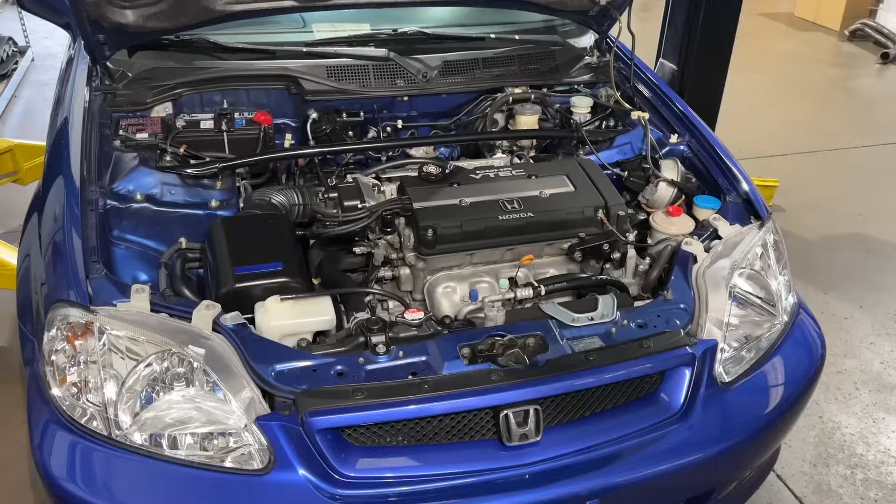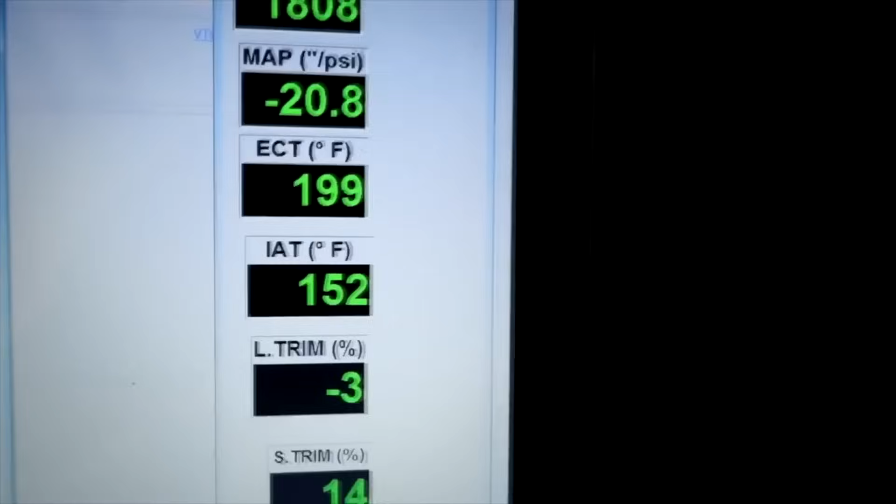So we supercharged this car about 2 years ago. So look how clean this thing is. This is as stock as they come. This is a Jackson Racing supercharger with a 10-pound pulley on it, notorious for having really high intake air temperatures. Watch this number right here.

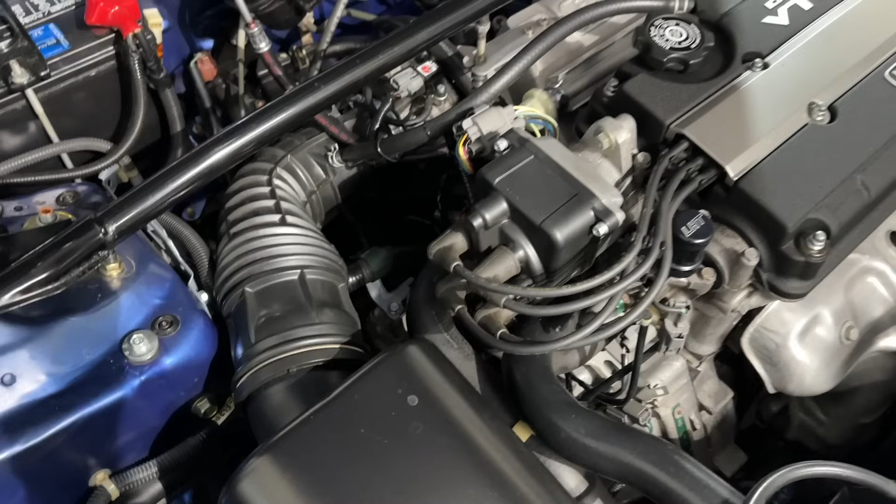He's doing one of our supercharger intercooler packages, as well as the Billet S Tube, the LHT Throttle Body, and the LHT Griptec Pulleys.

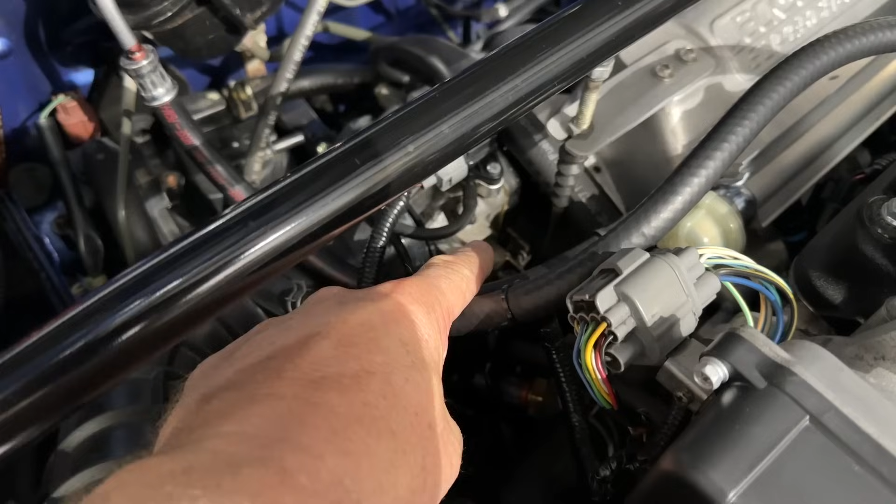One thing to note with our S Tube and Throttle Body, it takes all of that really tight area there and smooths it out. It's going to bring that throttle body out of that hole. It's going to eliminate this bracket right here. The throttle body bracket is all self-contained. It's a smoother transition. Not only does it make power, it just fits much, much nicer.

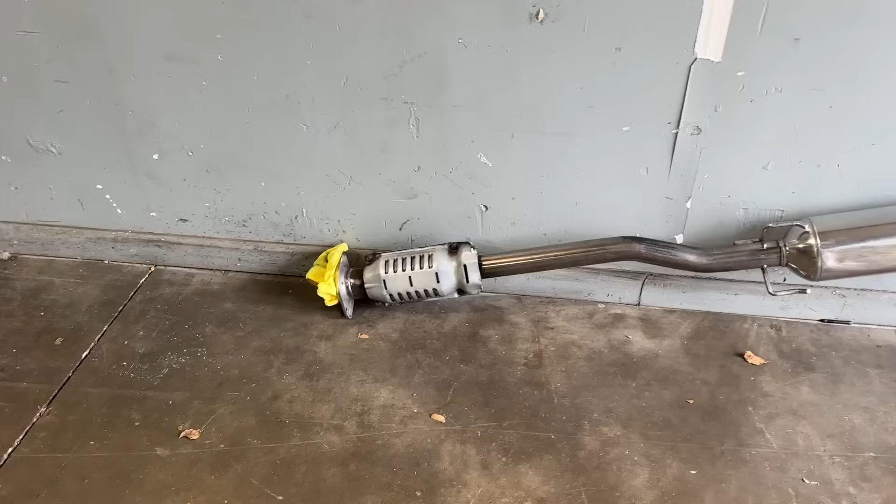There is a list and there are additional parts. So this is a muffler he wants to install and attach to the mid-Mugen exhaust that he has. And then we have some OEM parts right here. The Type R master cylinder right there.

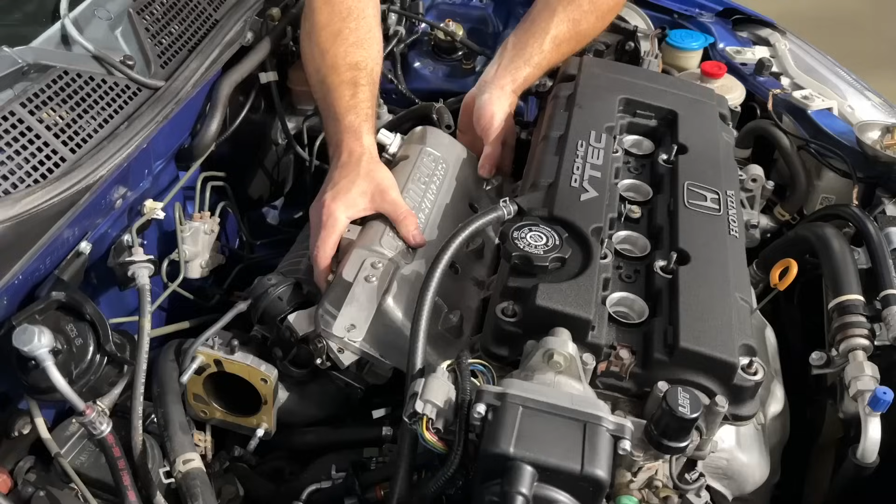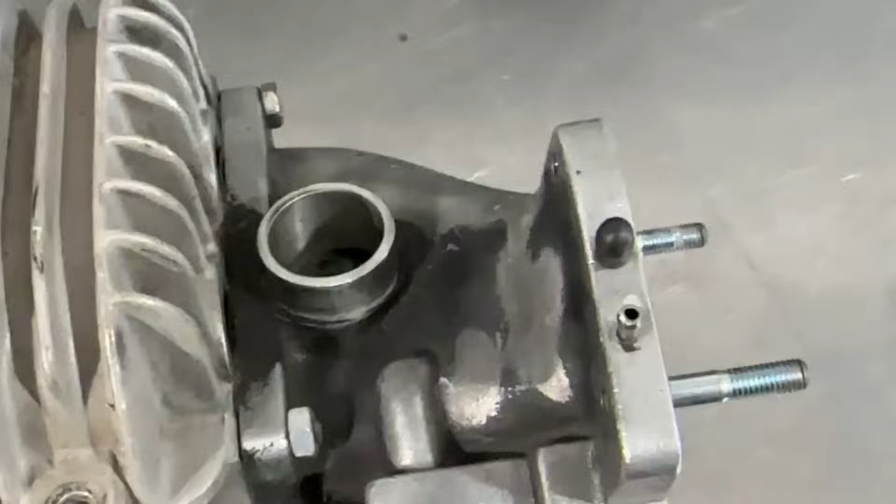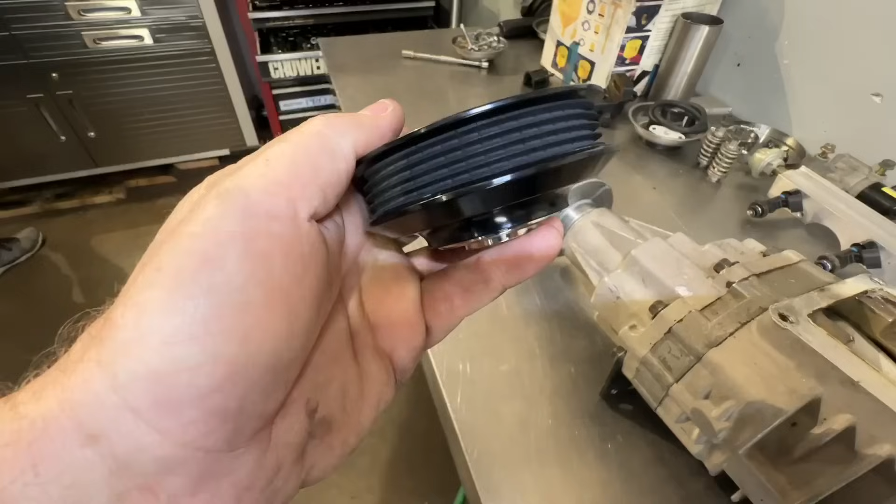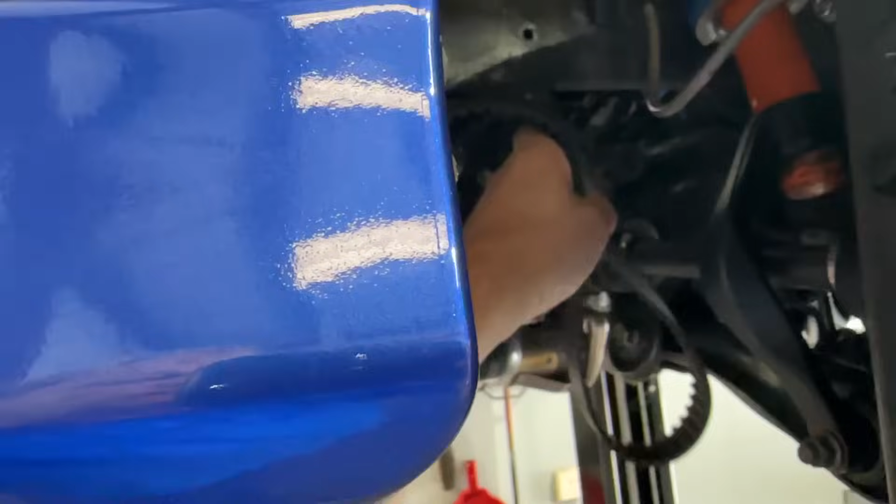Remember, on a supercharged Jackson Racing car, boost is restriction in the intake manifold. The better the engine breathes, the lower the boost. Hence why if you do a better flowing head, cams, header, intake and such, the boost will actually go down, the power will go up. We're also replacing the timing belt, water pump and tensioner at the same time. He's also supplied an ITR master cylinder, which will make the brakes much more powerful and more positive feel.

I do want to say a big thank you for the gift cards, Brian. It truly is appreciated. Thank you so much.

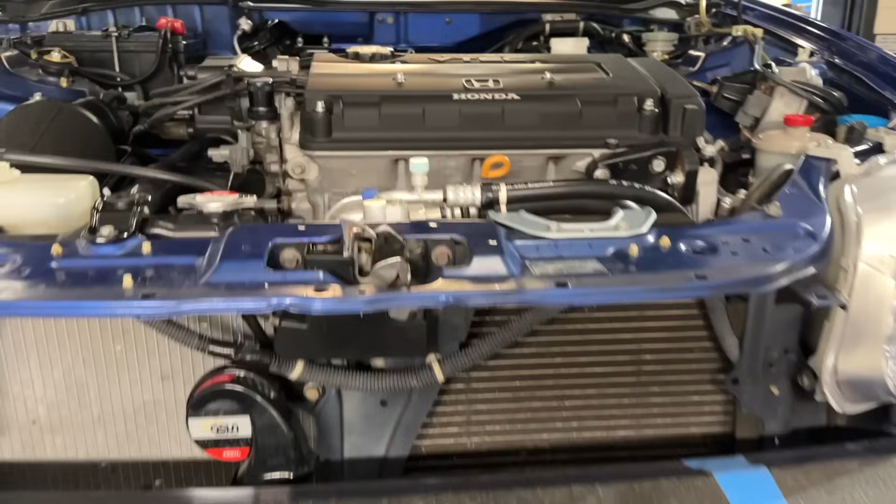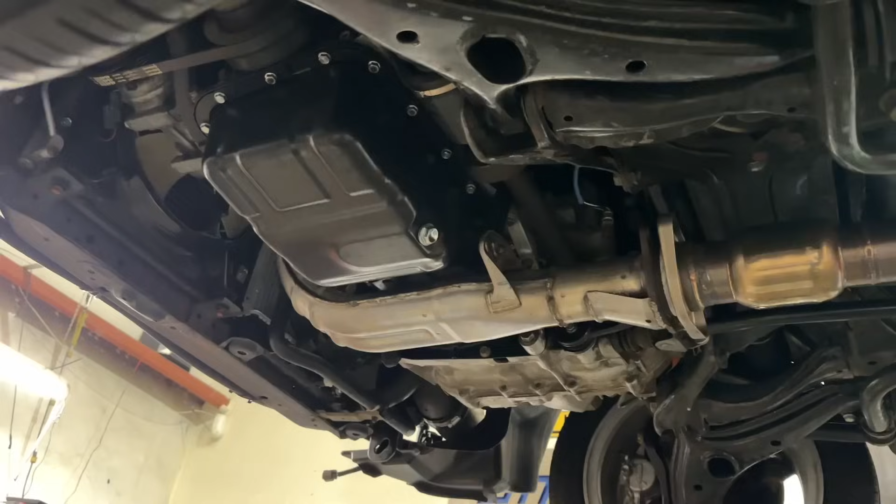For the intercooler, we're using a 50-50 mix of water and coolant. So he supplied us with a JDM header and a factory catalytic converter. So he wants to change that mid-pipe too. He supplied us with a Mugen mid-pipe.

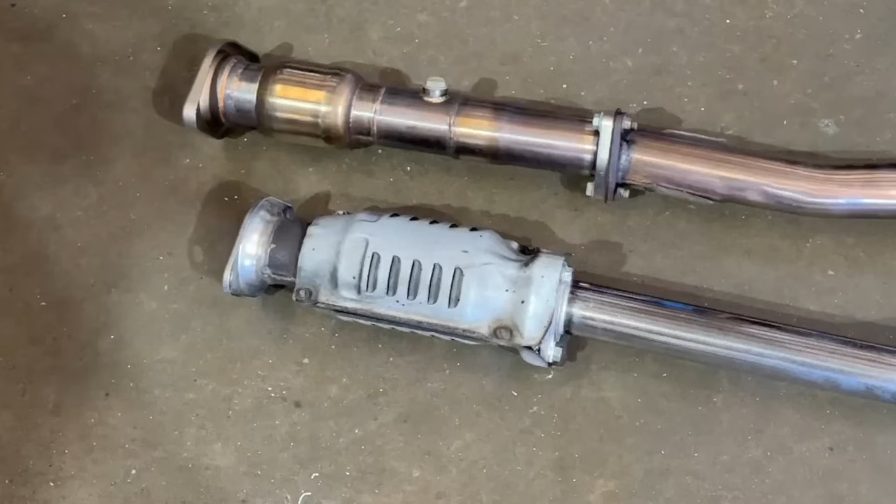When you look at it side by side, it looks very similar, but the front part before the resonator is actually slightly smaller than the OEM, but it does have a factory cat, and the flanges are 2.5 inch, which is the largest size, same size as like an S2000. The Japanese have that 2.5 inch. The US ones typically have a 2 inch. You'll see right here. The factory one has a 2 inch and the other one has a 2.5.

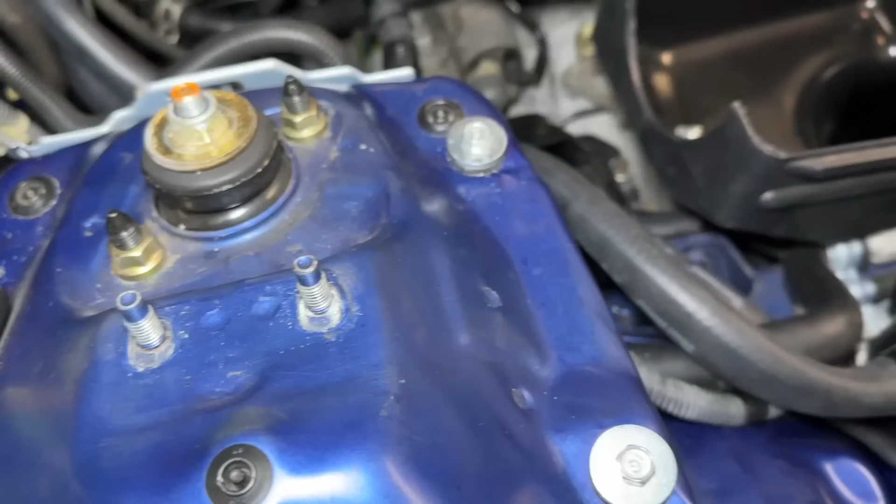So he supplied us two exhaust axle backs too. He supplied a Greddy one and a Mugen one. He wants to modify them so they can both fit and he can change when he needs to.

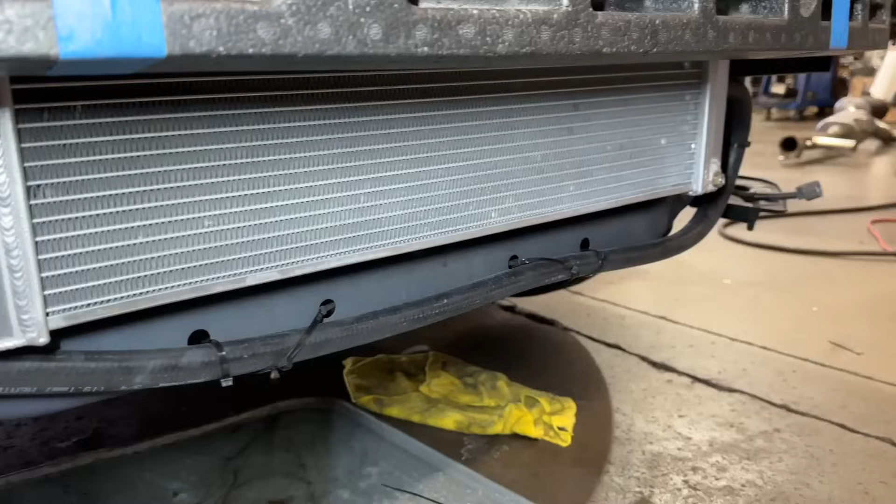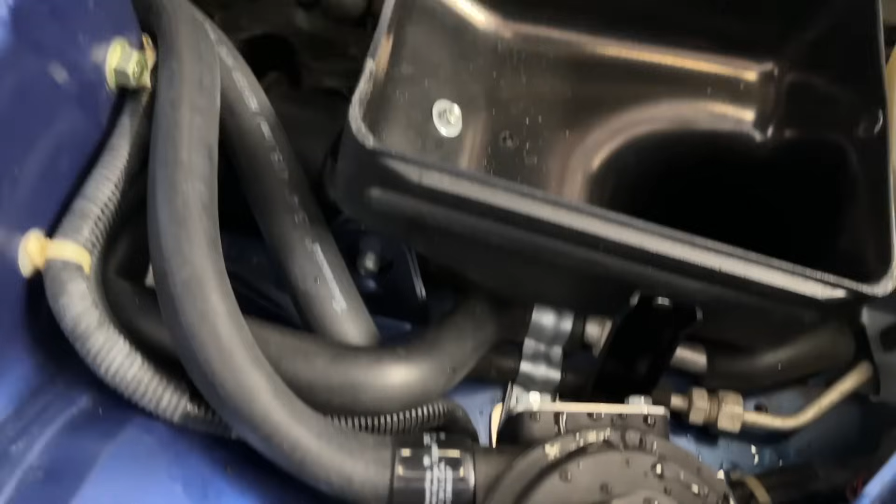So the LHT Intercooler kit is basically a water to air design. It pumps water around the system through the heat exchanger and through the manifold. It pulls the temperature out that way, similar to the radiator. And obviously pulls the temperature out there. Once that system is bled and double checked, then you can put the cap on.

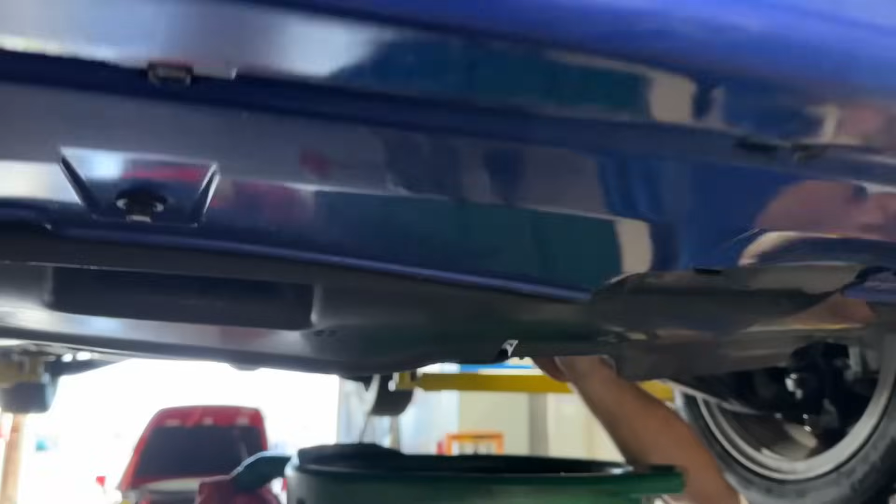It looks pretty stock back there. You can tell there's something going on, but it isn't too obnoxious, not quite as much as a front mount intercooler.

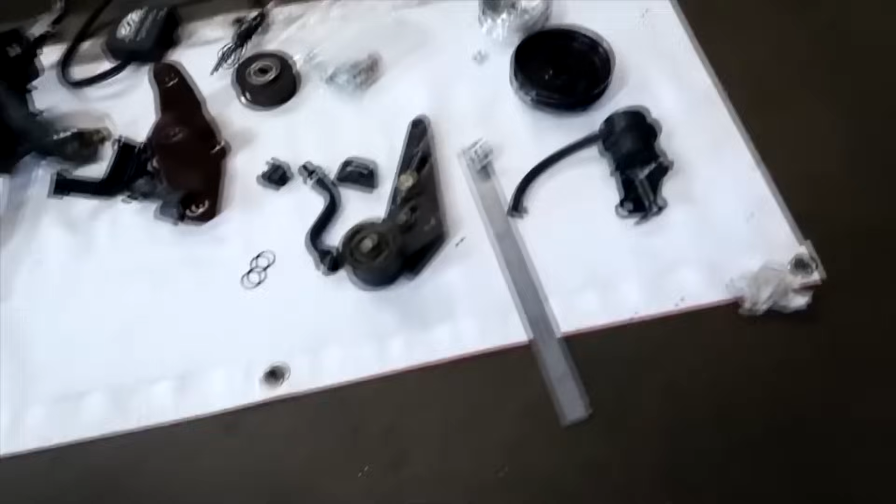So real quick, I want to take you back 2 years when we first did this car, and we were running all kinds of pulley and belt issues because he had an aftermarket kit. And then we decided to do a back-to-back run and drop the airbox just to see if there was any gains from removing the airbox, to see if it actually picked up any power. You're going to see an old friend in this video too. All right, check it out.

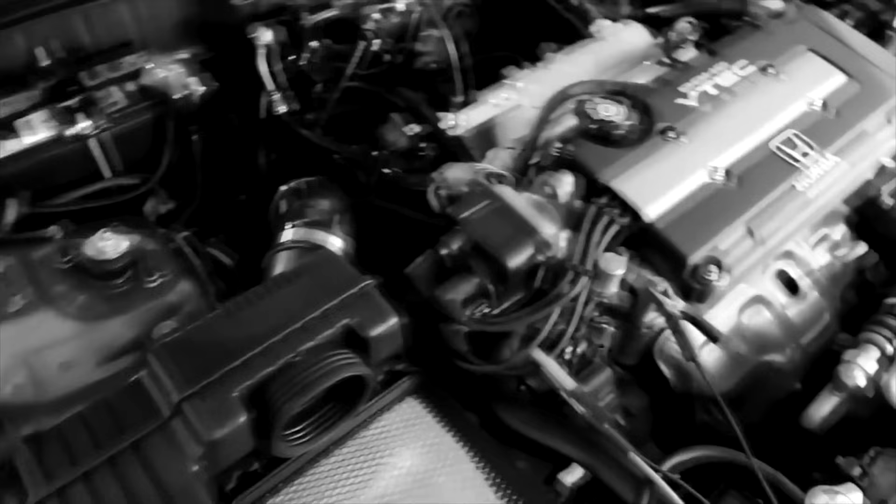Like I say, this might be a candidate for an LHT intercooler and a better intake and maybe a header. A few other things will make some power on this. But let's get basically an idea on the intake.

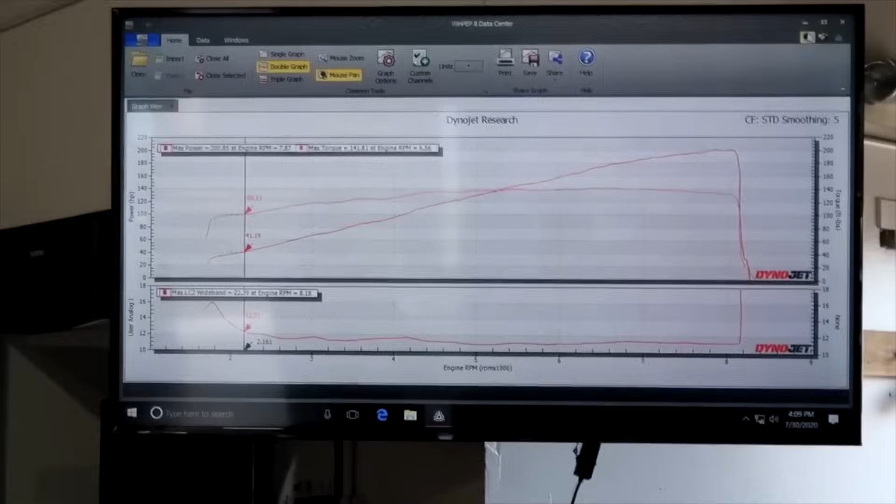200 on the dot. Yeah, looks like you're flat right at 200. So lifting that lid made 3 horsepower. So the last time Bruce was here, this happened. Yeah, that happened. So 200, 141, let's just see back-to-back runs. It's still hot. I mean, it made a little bit of power. I mean, it's 3 horsepower.

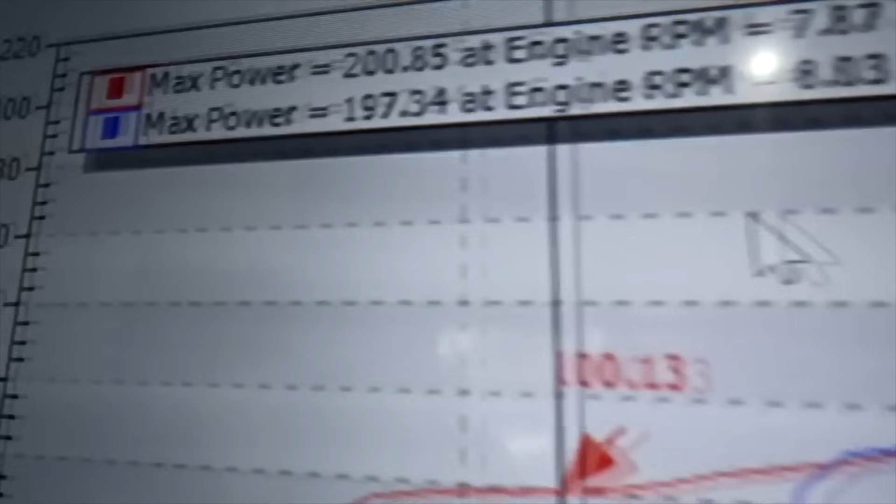So this was a big part of my life back in 98, 99, 2000. These are all supercharger belts that we have trashed on this car. This is one that completely shredded. This is an absolute game changer for the Jackson Supercharger. These are pulleys we've had made by Griptec. Not only does it have the Griptec coating and their unique traction, so you don't run into belt issues, the belt alignment is perfect.

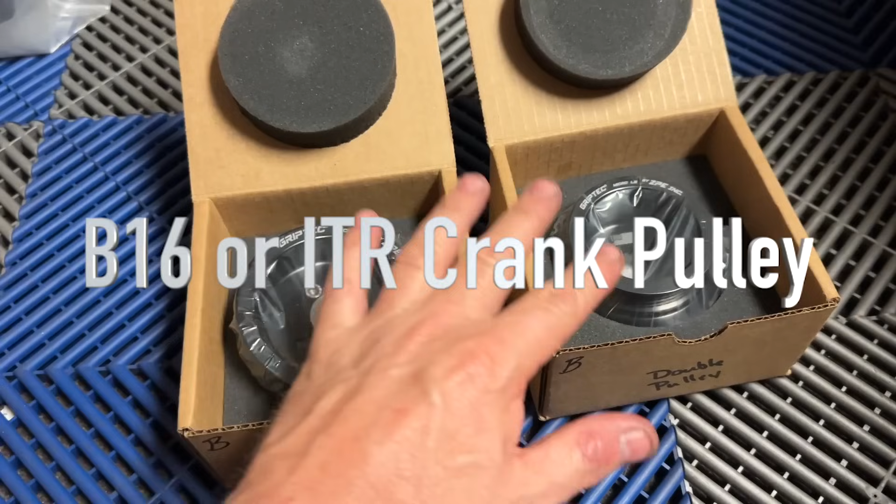And also what we've done is design this to give the blower the maximum speed to give you the most power. Now this combination, again, it has to be a B16 or ITR crank pulley for this to work. It's going to give it the maximum RPM the blower can take safely, up to 8,800 RPMs. B16s, they tend to run a little bit higher boost. We're going to offer a different pulley for the B16s. And also, if you're going to run a GSR crank pulley, you'll be able to use the same pulley for the blower as you would on the B16s. It's going to basically be a larger pulley, so it slows the blower down.

I designed my own pulley system back in the day. I spent a lot of money, had Dayco specially built belts. I went through different belts. I actually designed a 5-rib system. I spent a fortune. I almost went broke doing this just because I wanted a better system. This is it. You just saw that car. That had all kinds of belt issues. It had different brackets. We went through a lot of time trying to go through his stuff. In the end, we put the factory Jackson Racing stuff back on, but the pulleys were still an issue.

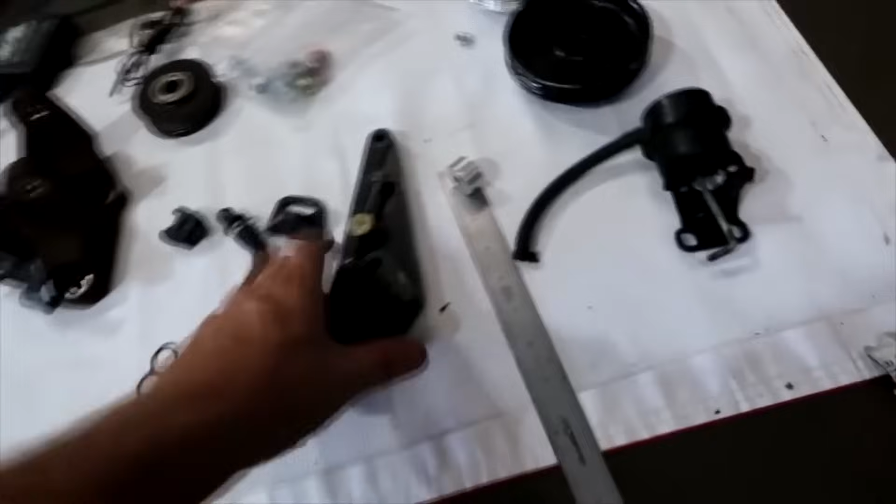This is a game changer. We have them in the store. They are the pair right here. This is the blower pulley. This is the alternator pulley. It is a double pulley. It is a stepper. Now, this is the factory Jackson bracket. He has the reproduction bracket. We did a little digging around. It's by a company called 1320. There are some companies reproducing bits and pieces. It's got cheap hardware, bolts break, they shear off.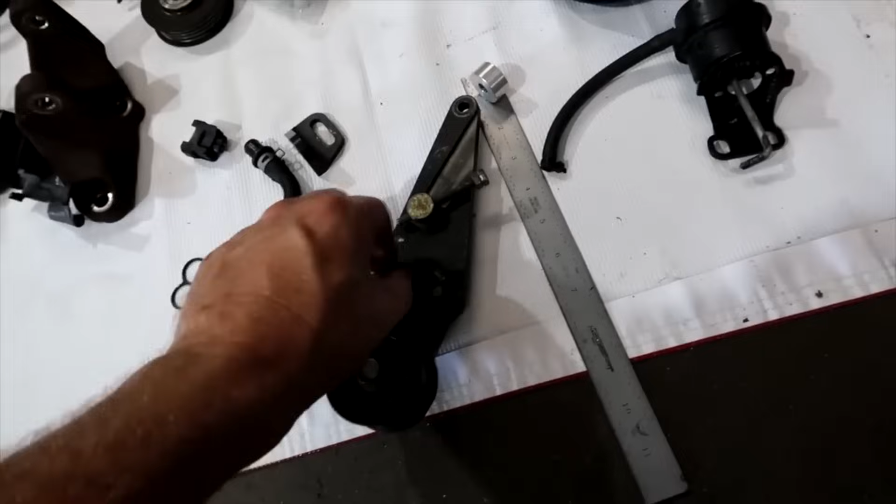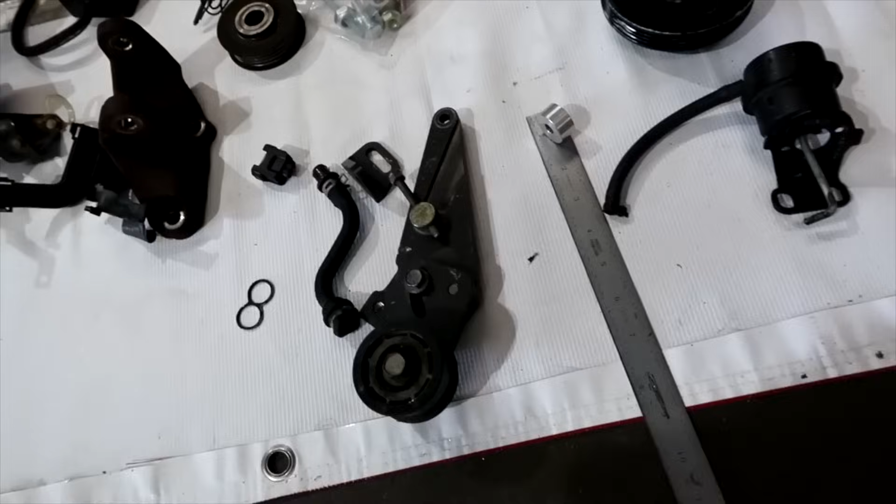I mean, the pulleys look to be pretty good, but long story, we've had the supercharger on and off 3 times. So might have to change the policy on installing used superchargers. I've always shied away from it. Now I think I'm gonna run away from it. But yeah, belts, you can't really tell, but I burnt that finger bad on a pulley because I touched it and this belt stuck on there and it got hot. Anyway, so it's going to require some tuning. We're going to put it on the dyno and do some back-to-back runs to show you what kind of power we can get.

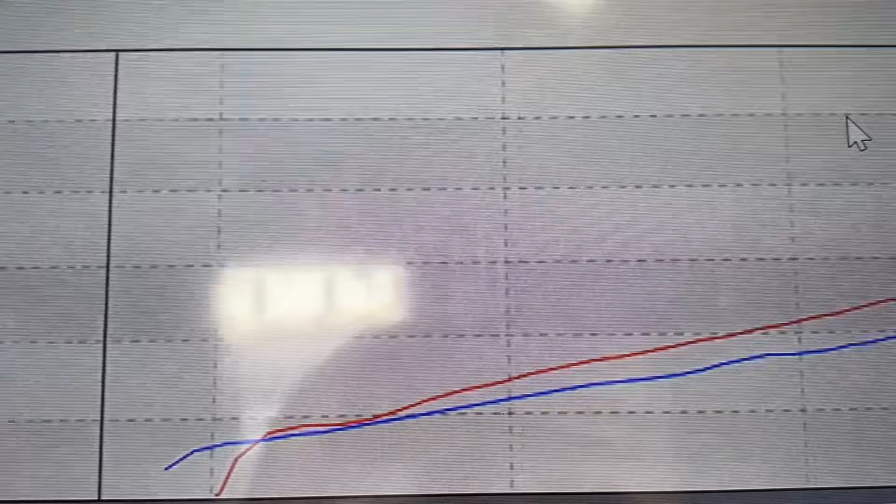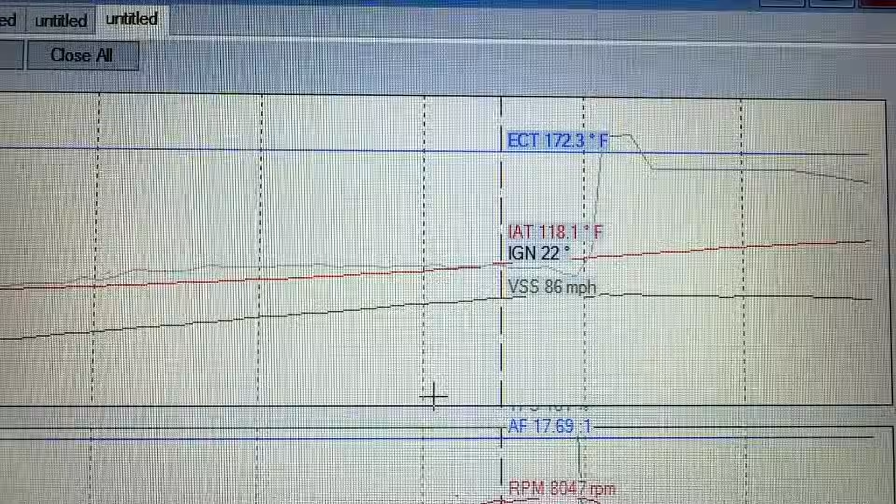So pretty much the same boost. We picked up 39 wheel horsepower. And again, this is a bone stock factory B16 running 93 octane. We're not pushing this motor. Plus factory ITR header and factory cat. There's obviously another 20 horsepower to be made there. But this is a true daily driver. And look at the intake temps. Back-to-back runs over and over and over. 120, 122 was the highest we saw on the dyno.

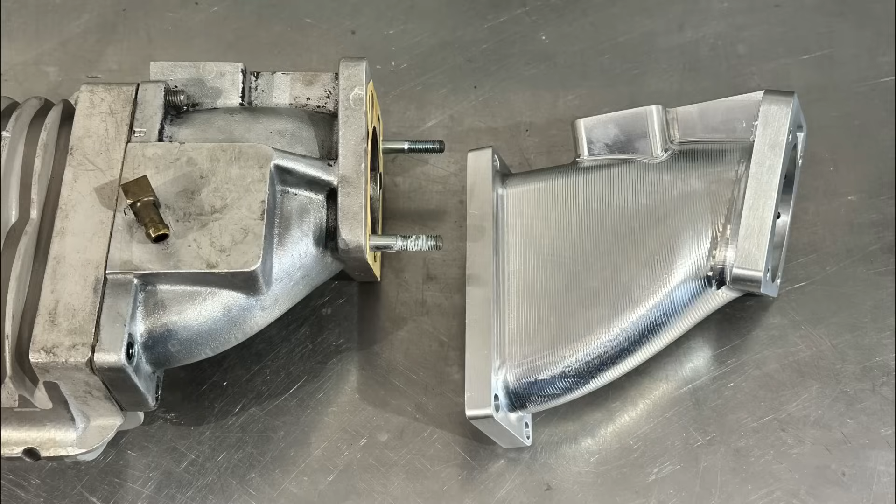All right, back to our little iconic tuning road. A lot of people have said, hey, when I visit LHT, I come down this road and I feel like I've seen it before. Which you have. We use this little side road just to kind of test cars. We don't do anything too crazy down here. It's just the fact there's not a lot of traffic. It's quiet. If something is happening with a car, we can usually hear it and identify it. And it gives us time to make sure the brakes work, steering doesn't have any funny clicks to it, clutch operates properly, and the car feels good.

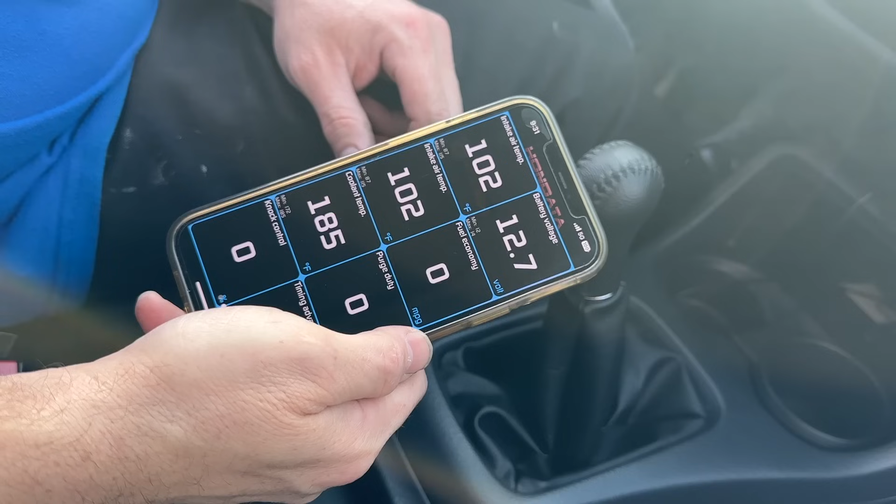I have it up there twice. Staying pretty consistent, isn't it? Oh yeah.